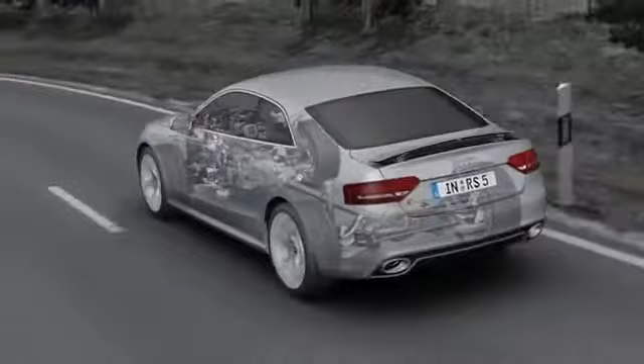The Quattro permanent four-wheel drive system has a long tradition stretching back over 30 years. It permanently and optimally distributes the power from the engine to all four wheels, providing a high level of active safety and reliable traction on practically all surfaces, with optimal straight-line driving. Its permanent safety advantage makes it far superior to other all-wheel drive systems that have to be activated.

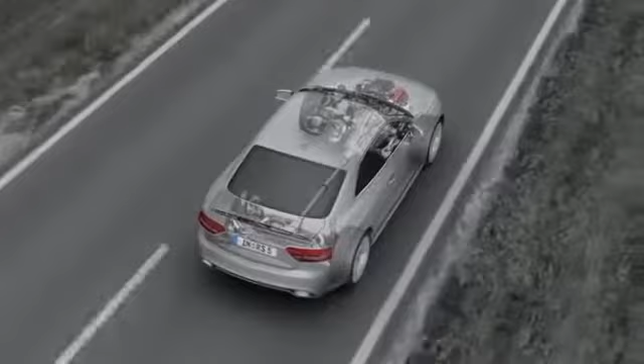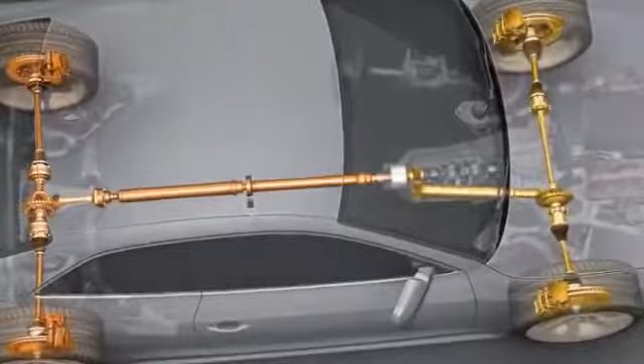The principle is simple: just as four brakes provide for better deceleration, four driven wheels provide for better acceleration and greater lateral stability. The new Audi RS5 sees the introduction of the latest generation of Quattro with crown gear, center differential, and torque vectoring. The task of the center differential is to distribute the drive force of the engine to the front and rear axles.

If, for example, one of the wheels on the front axle starts to spin, the crown gear center differential will immediately spring into action. Up to 85% of the drive force will promptly be fed to the rear axle. This can be seen here with the turning differential gears.

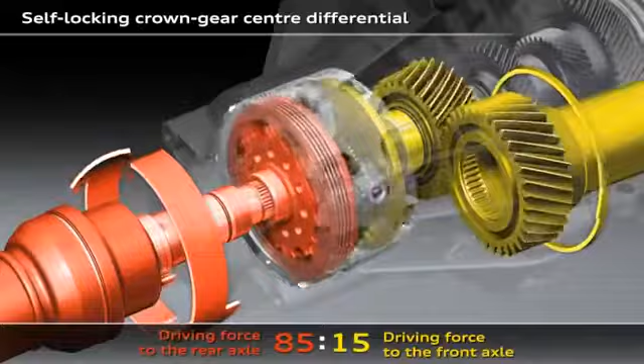If the wheels on the rear axle start to spin, the crown gear center differential will immediately feed up to 70% of the drive force to the front axle.

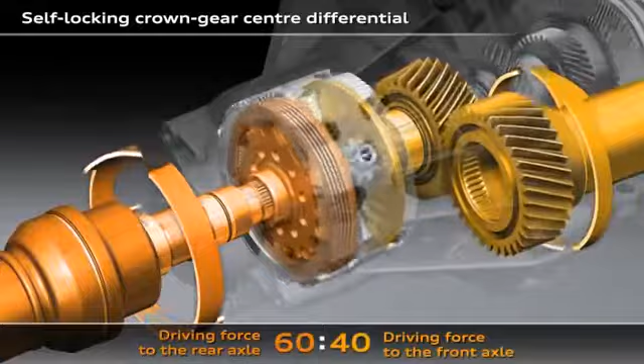In its basic configuration, 60% of the drive torque is fed to the rear axle and 40% to the front axle. Here you can see the structure of the crown gear center differential, the heart of the Quattro drivetrain.

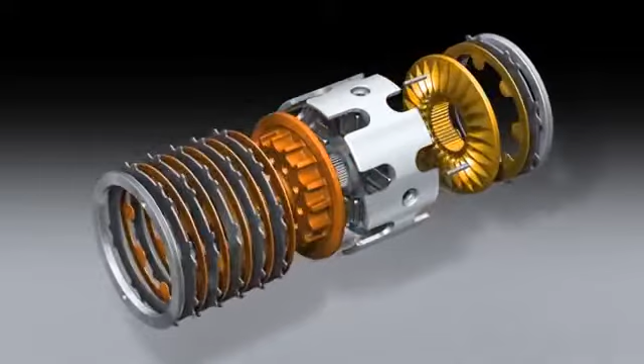The drive force is introduced via the components illustrated in grey. The gold-coloured parts drive the front axles and the bronze-coloured parts drive the rear axle.

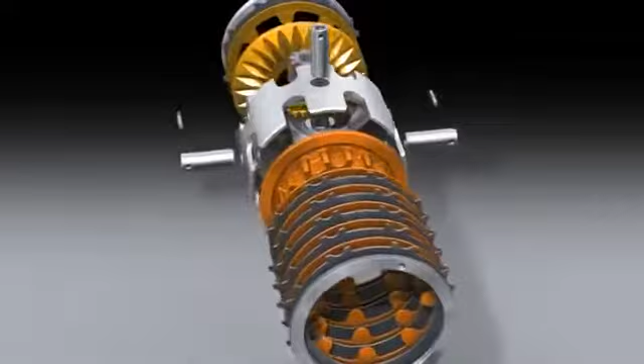If there is a difference in speed between the front and rear axles, the center differential will spring into action and generate a locking torque with the plate packs. This means the drive force will be distributed to the two axles according to actual requirements, allowing more power to be transferred to the wheels.

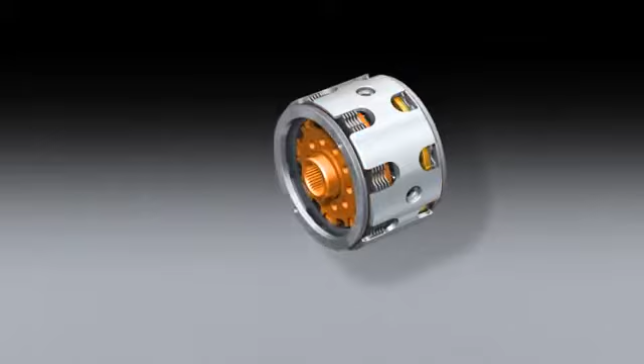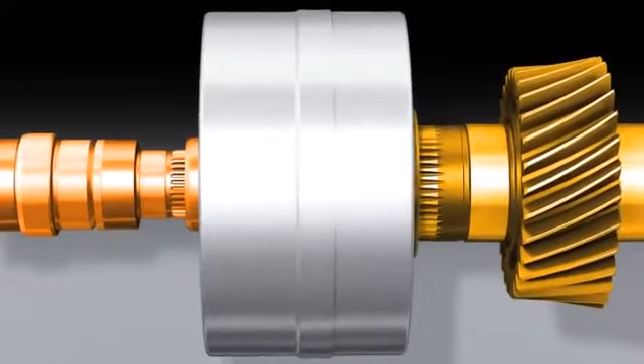The new crown gear employs a metal cap to keep flow losses to a minimum. The basic distribution is generated by gears with different diameters meshing with the two crown gears.

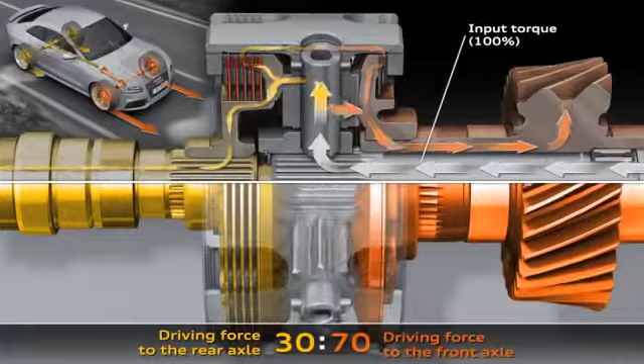The arrows symbolize the flow of torque or force. For example, if the wheels on one of the drive axles are unable to transmit the full force, the center differential and its differential gears will spring into action. The force will immediately be fed to the axle with the better traction, with zero time lag.

Without ESP intervention, this happens with up to 85% to the rear axle and up to 70% to the front axle. With an electronic control system, up to 100% can be fed to a single axle.

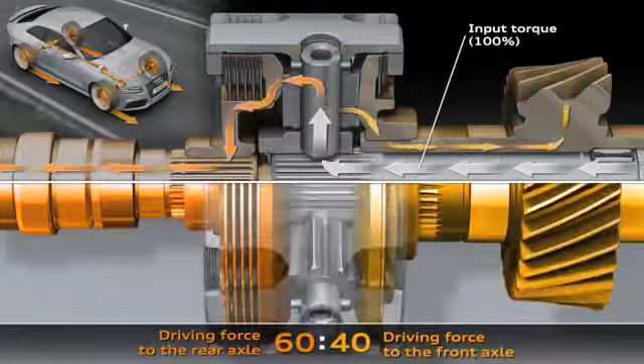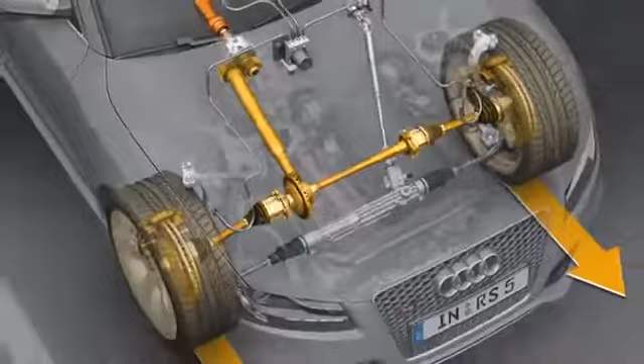The good dynamic performance characteristics of the Audi RS5 with crown gear center differential are noticeably extended in conjunction with torque vectoring. An additional steering torque is generated according to the situation and the driver's needs.

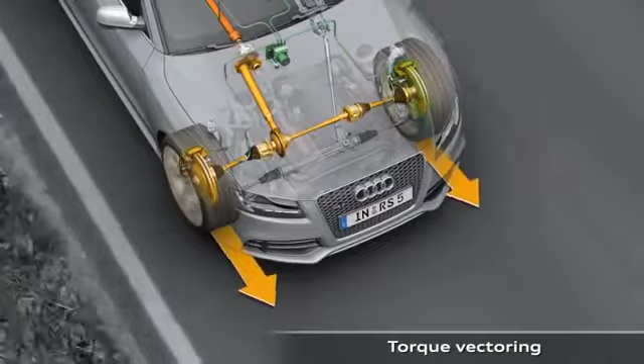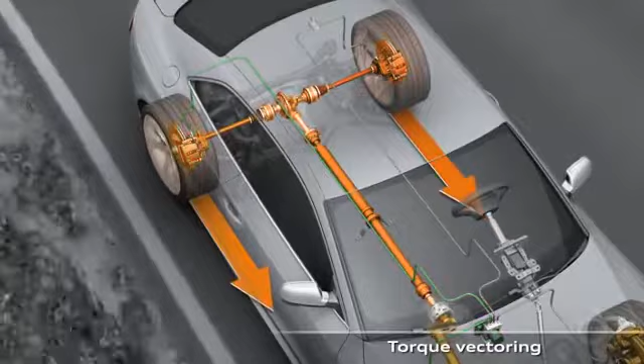Finely metered braking torque is applied to the two wheels on the inside of the curve. This creates a difference in drive force on the left and right-hand sides. At the same time, the longitudinal drive force distribution is optimized according to the driving situation by the ratio of the brake force application on the front and rear axles.

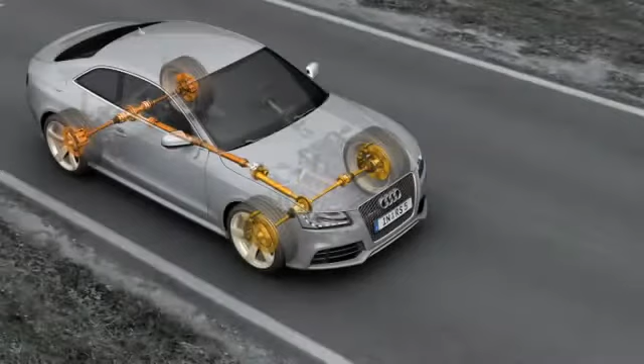When pulling away and when accelerating rapidly, more drive force is fed to the rear axle. The combination of crown gear center differential and torque vectoring on the Audi RS5 provides for precise handling even when cornering.

This happens with zero time lag, in accordance with the driver's steering and acceleration commands. The dynamic drive force distribution allows excellent exploitation of the traction potential, good track stability, and outstanding agility.

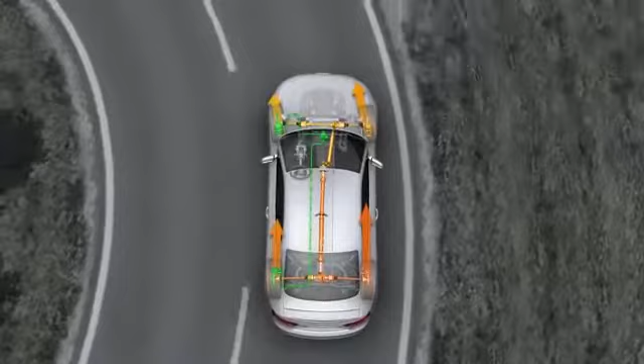The torque vectoring system was developed by Audi to act before the wheels start to spin, reducing undesirable effects. The combination of the Quattro drive system with crown gear differential and torque vectoring gives the Audi RS5 outstandingly precise control right up to the car's handling limits.